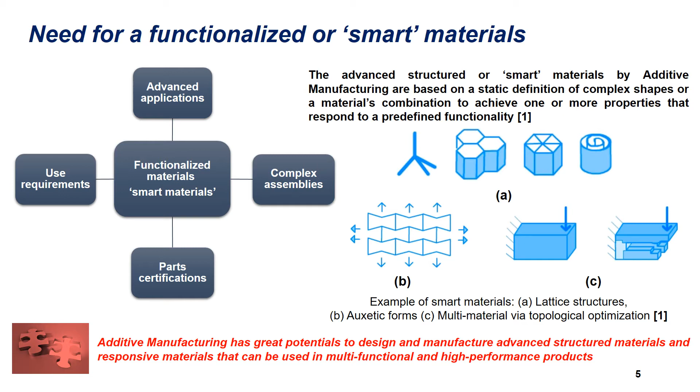Our work deals with developing pre-structured materials using fused deposition modeling process. For this process, classical deposition with plus 45 minus 45 degrees angle orientation is commonly used thanks to its capacity to have higher infill percentage.

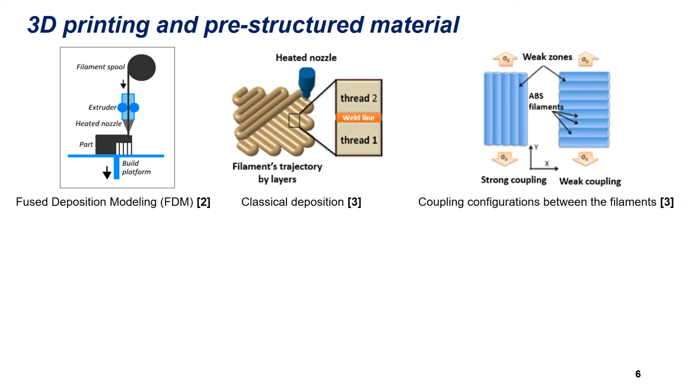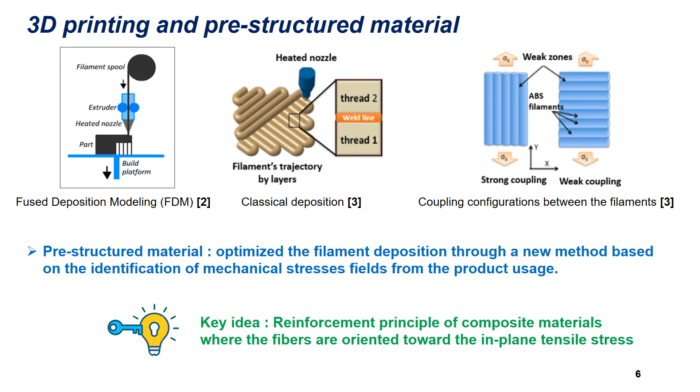Thread deposition can be not suitable to the mechanical constraint of a product, according to its use, especially when a weak coupling occurs between the filaments. Therefore, the filament deposition must be optimized through a new method based on the identification of mechanical stress fields from the product used. The key idea is to orient filaments toward tensile stress, allowing a strong coupling between the filaments similar to the principle of reinforcements of composite materials.

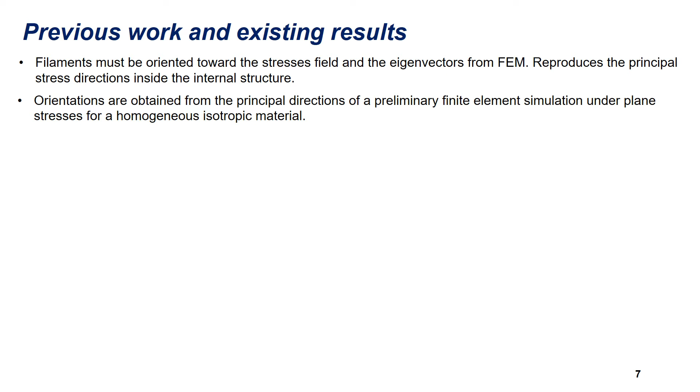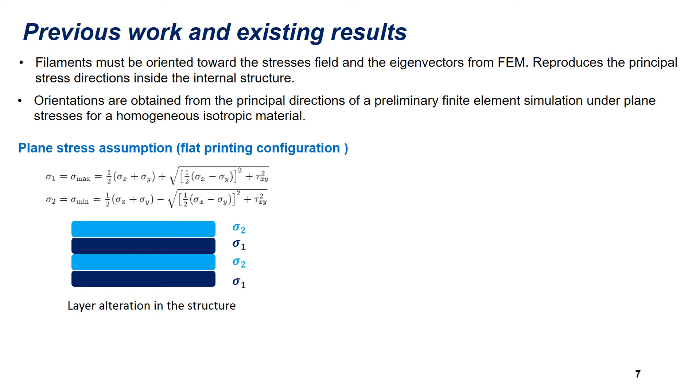An optimized method was developed based on reproducing principal stress direction inside the structure. Those orientations are obtained from the principal direction of preliminary finite element simulation under plane stresses for an homogeneous isotropic material. Since the filament has only one possible deposition angle, a layer alternation inside the structure is used between both principal orientations. In the region where principal stresses are the highest and mainly tensile, optimized trajectories will be generated.

Previous work on a CT specimen proves improvement by over 20% of the fracture toughness, showing therefore the beneficial effect of such deposition method.

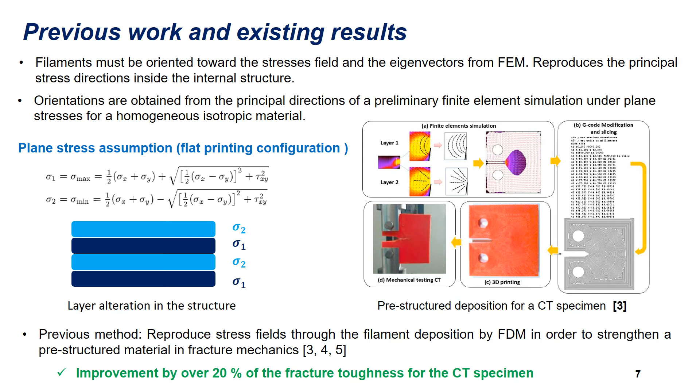For the sake of better understanding this beneficial effect, our strategy is to develop a numerical model based on mechanical characterization of the pre-structured material in order to have a predictive model that goes into fracture.

Such model requires facing some challenges. First, we need to deal with the complex trajectories and the printing parameters, then characterize the mechanical behavior of the material. Once the model is fully developed, it will be used later on to investigate the optimized deposition method.

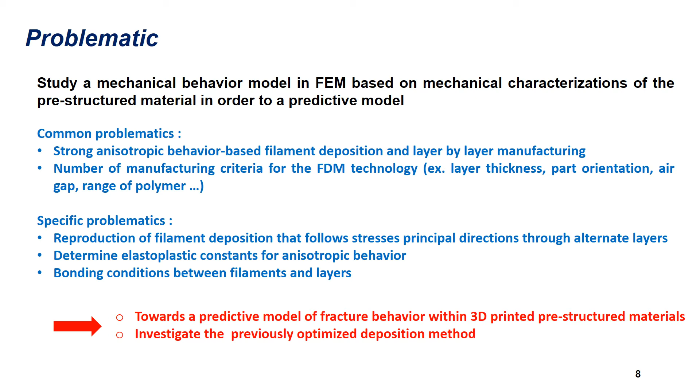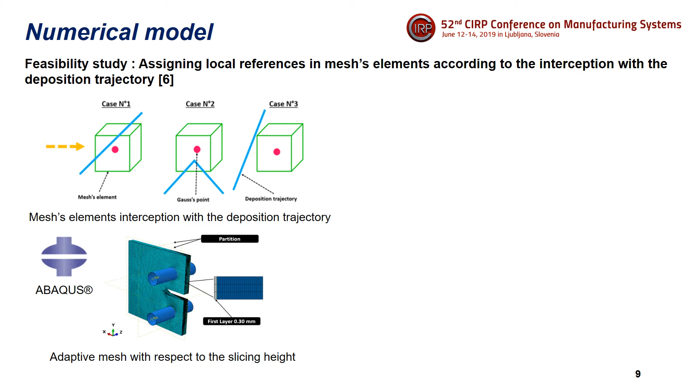Feasibility study was done consists on reproducing the printing trajectories inside a finite element model by assigning local references in mesh elements according to the intersection between the deposition trajectory and each element faces. As presented in the figure here, this method was successfully applied on a CT specimen and both principal directions are well reproduced.

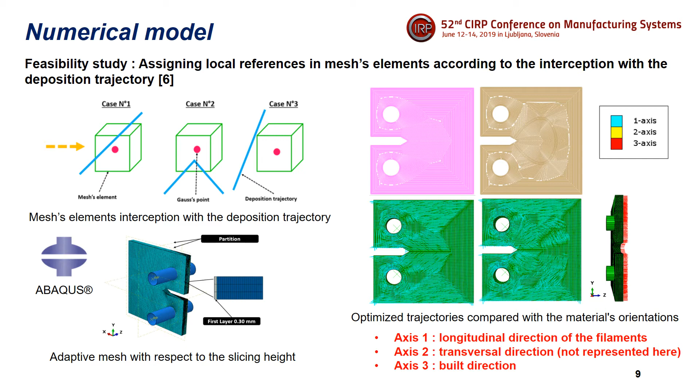For further information about smart materials and optimized method, I kindly invite you to check the following references.

In the next section, the methodology adopted for this work and the purpose of this study will be presented.

Our model requires specific work divided into three steps. One includes built anisotropy, which can be judged as achieved. Second, we need to identify the mechanical behavior until fracture. Finally, we will use peridynamic simulation to model the fracture.

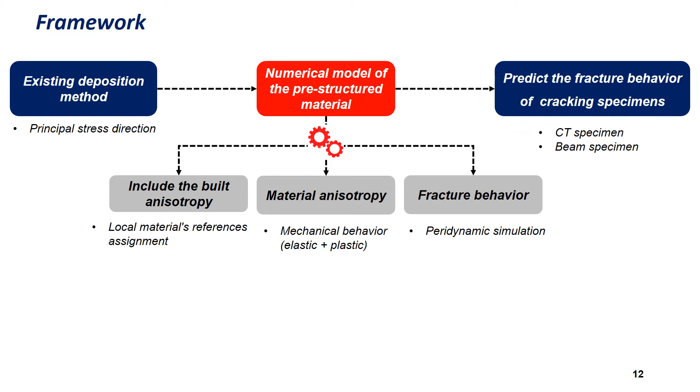Developing a predictive model of pre-structured material poses a challenge, especially identifying the inputs using different identification protocols and experimental methods. Various material constants must be well identified, such as elastic constant, energy release rate, and bond properties.

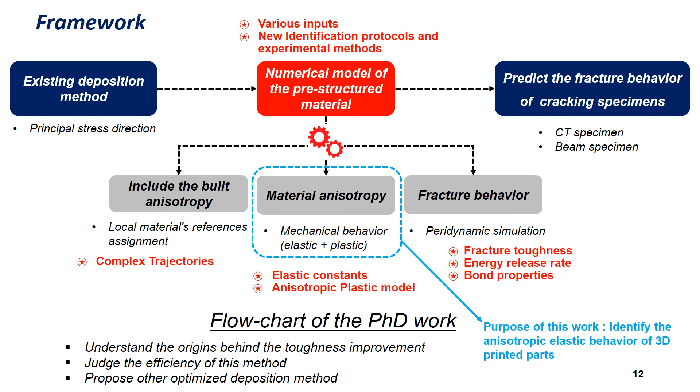The purpose of this work is to identify the anisotropic elastic behavior of pre-structured material using digital image correlation, including longitudinal and transverse modulus, in-plane Poisson ratio, in-plane shear modulus, and the Poisson ratio in the isotropy plane.

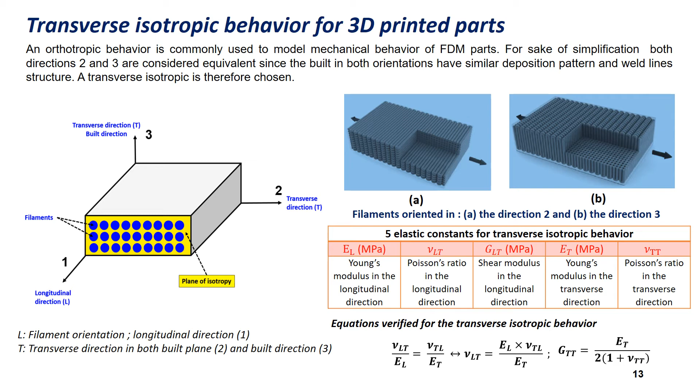For the methodology, first an experimental identification will be done through tensile tests with different filament orientations. Then the identified elastic constants will be validated using an error evaluation by comparing experimental results with numerical results. A cost function will be defined based on difference evaluation between subset data and integration point data.

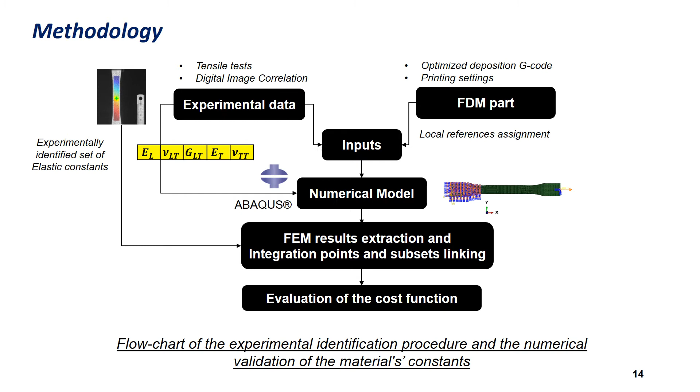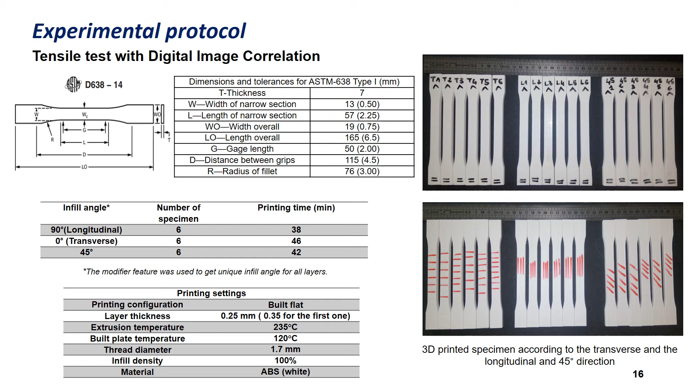The experimental identification will now be presented. Here we start by printing tensile specimens according to the transverse, longitudinal, and 45 degree directions. White ABS filament was used in order to have better contrast while applying the black speckle.

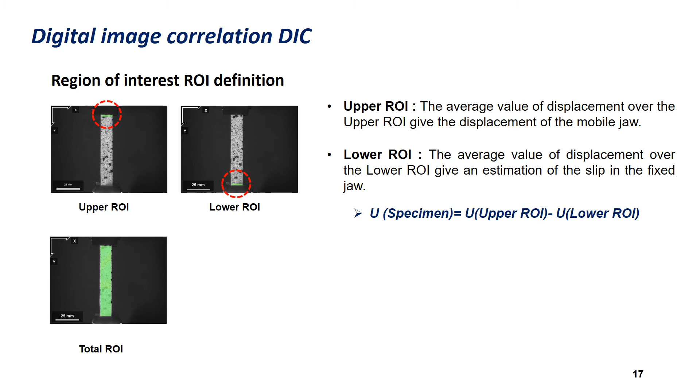For every tensile test, three regions of interest will be selected. A method was used to access the true displacement of the specimen. Here we note that we were confronted with numerous slip problems and filament delamination inside the jaws of the machine. Then a large region of interest is defined to get an average estimation of both longitudinal and transversal strain, therefore allowing calculation of the Poisson ratio.

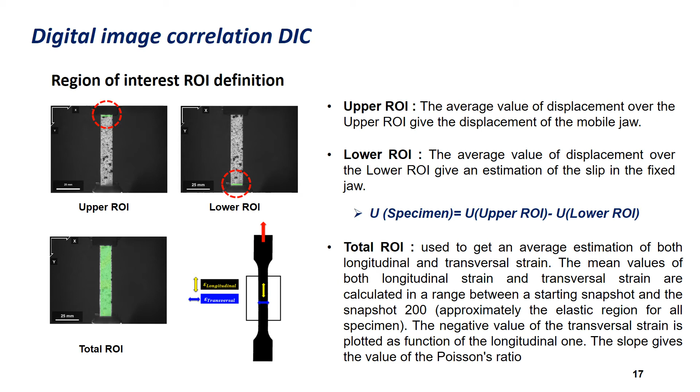Using DIC avoids the problems of placing a strain gauge on the surface of the 3D printed specimen, since the surface is not perfectly flat and delamination of filaments is possible.

For experimental identification, three elastic constants are directly identified through tensile tests: longitudinal and transverse Young's modulus and in-plane Poisson ratio. The shear modulus will be calculated through stress analysis of the 45 degree specimen.

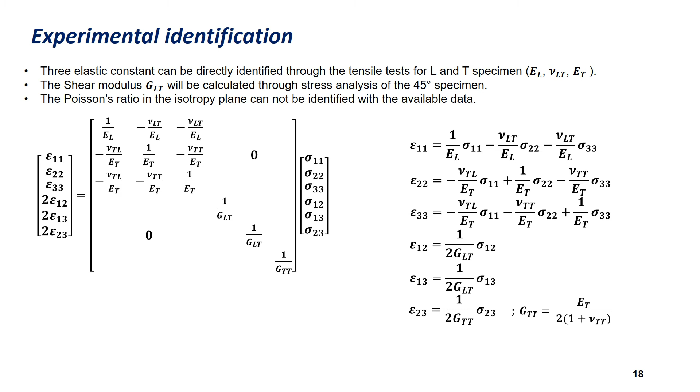For the Poisson ratio in the isotropy plane, we are working with a plane stress geometry and only performing DIC on the surface. As the following equations show, this elastic constant is activated when we have off-plane shear loading or in-plane stress. For the case of in-plane stress, we need to measure the out-of-plane displacement.

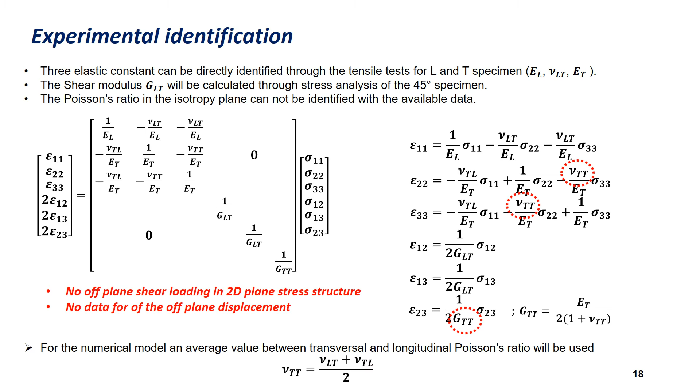For our study, we will use an average value between both values for the longitudinal and transversal specimen.

The shear modulus is calculated using stress analysis of fiber-reinforced composite. Using a coordinate transformation of stress from the global reference to the local one, we can calculate the shear modulus using both longitudinal and transversal Young's modulus previously identified and the experimental value of the Young's modulus of the 45 degree specimen.

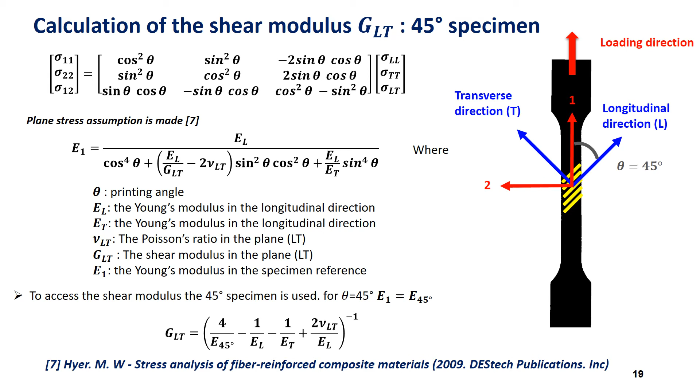Now we go to the results. Reaching the plastic limit with proper stress and strain levels is crucial for our study.

Since ABS presents a non-linear elastic behavior, two methods will be used to calculate Young's modulus. The first is a calculation as the slope of the tangent of the true stress-strain curve at low stress. The second considers a linear elastic behavior that goes until the yield stress point.

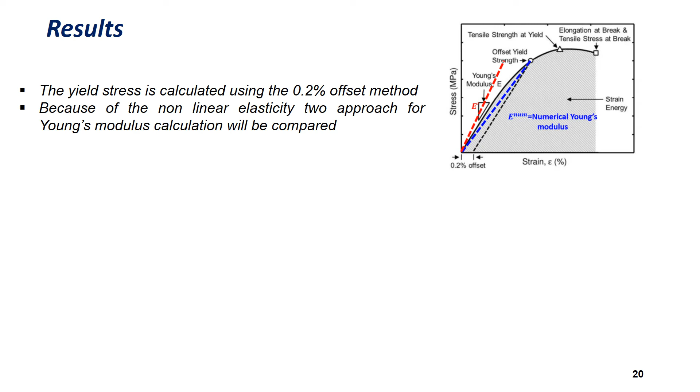Values are then compared to literature, showing some differences that can be related to printing configuration, which can directly influence the mechanical properties. Although both specimens, longitudinal and transverse, show implicate different coupling between the filaments, the values of Young's modulus are very similar. The elastic behavior of the pre-structured material can be assumed as isotropic, and the anisotropy was observed mainly with both yield stress and tensile strength.

For the last constant, we are working on an experimental setup to allow us to calculate it. The idea is to use a digital image correlation setup with two cameras that gives an estimation of the off-plane displacement.

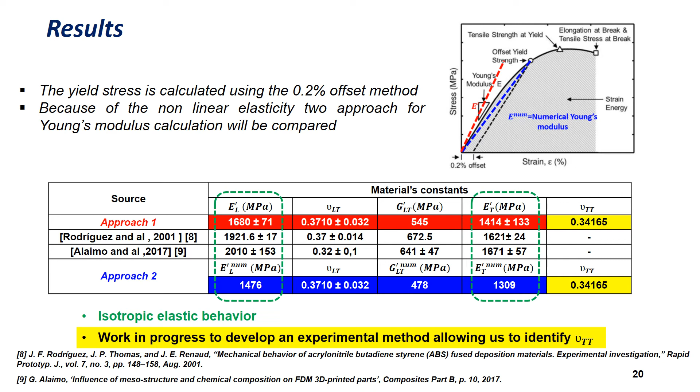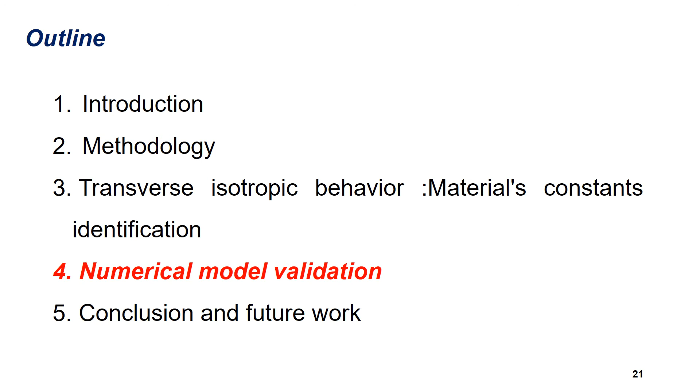Next step is to check the validity of the identified elastic constants. For that, we will use the local reference assignment to reproduce the deposition trajectory into the model.

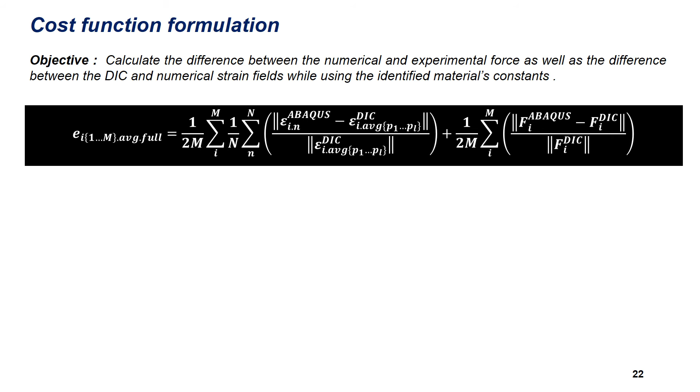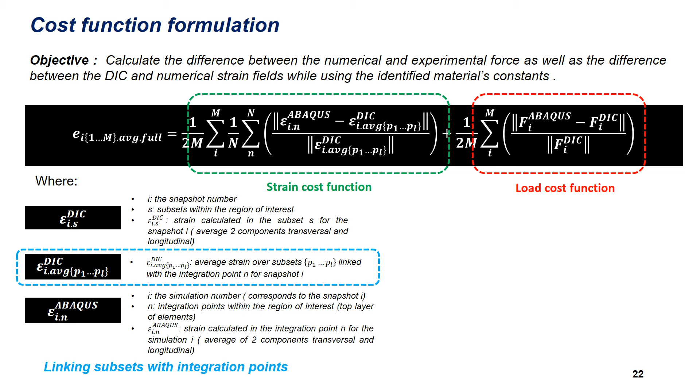The objective is to calculate the difference between the numerical and experimental force, as well as the difference between the experimental strain field and the numerical strain field using the previously identified material constant. For that, a cost function was defined, decomposed into a strain cost function that compares data between integration points and the subset from a snapshot, and a load cost function, which compares the experimental load and the numerical load. We also decided to evaluate the cost function on different loading steps.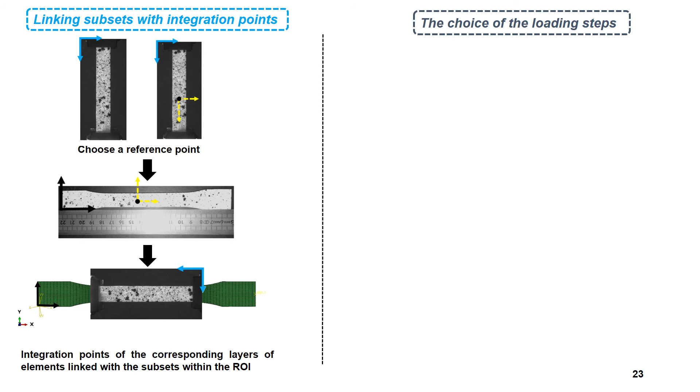First, we perform a linking procedure between the subsets in the reference snapshot and the undeformed mesh. Here, the density of subsets is higher than the integration points, so we decided to reduce data size to fit the number of integration points by linking each one to the neighboring subsets.

Also, 7 loading steps were chosen from the start of the test to the yielding point, but later we discarded the first two because low strain values are easily perturbed by the noise of the DIC measurements, and the measured load values are affected by the loading phase slip, or the slip between the jaws observed in the beginning of the test.

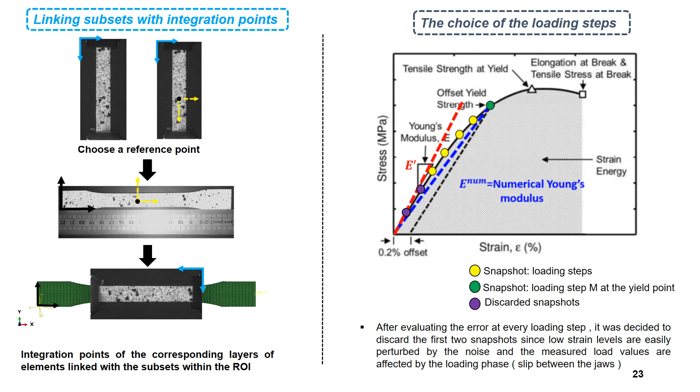Here are the results for the valid specimens. Sadly, for the transverse direction, only one specimen is valid.

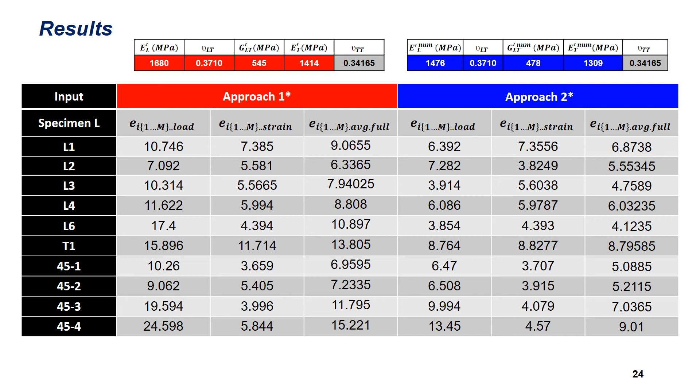To compare both approaches: first, both approaches give accurate estimation of the strain field. The nonlinearity observed with the true tensile curves is the main reason behind the high levels of error for the load cost functions with both approaches. But the second approach is still giving lower error values.

The nonlinearity observed with the true tensile curves is the main reason behind the high levels of error for the load cost function.

At this point, by comparing the final cost function between the two approaches, and especially knowing the purpose of our study is to model the behavior until fracture, it's very clear that approach number two is more appropriate to our project. So this approach will be used.

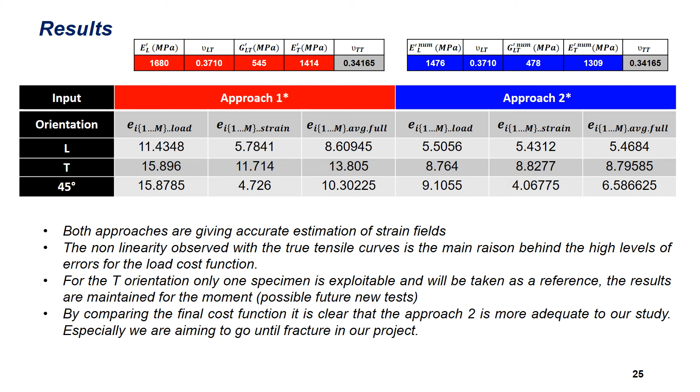Now let's check the validity of those identified constants on a complex geometry. For different printing configurations, bending specimens are chosen. Classical specimens at plus and minus 45 degrees, and an optimized one, are printed, and the numerical models are oriented accordingly.

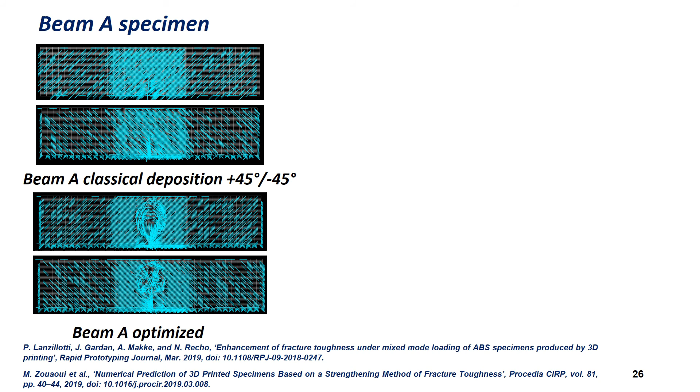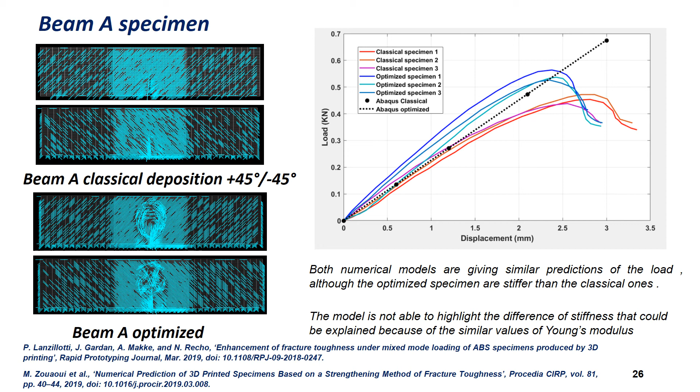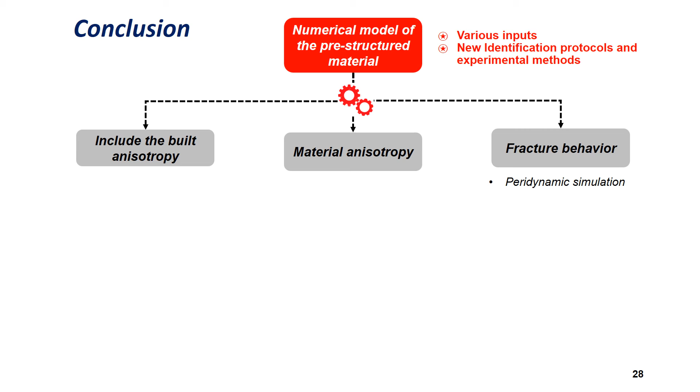Now we finish with the conclusion. As we said before, developing our numerical model goes through three main steps and requires the identification of various inputs. For the built anisotropy, we can say that our method is efficient and allows us to reproduce complex trajectories in the finite element model. Another important finding is that the elastic behavior is almost isotropic.

What we have developed for the cost function evaluation can obviously be used to re-identify all four elastic constants at once, via a finite element method updated identification with an optimization method, on beam or CT geometry, with a specific choice of region of interest according to local loading states.

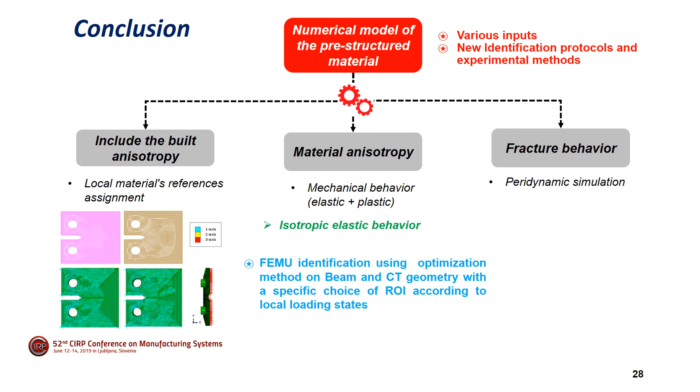A work in progress concerns identifying an anisotropic yield criterion, which is the Hill criterion, and the plastic model that leads to crack initiation. Then, the next step will be to model fracture using peridynamics simulation.

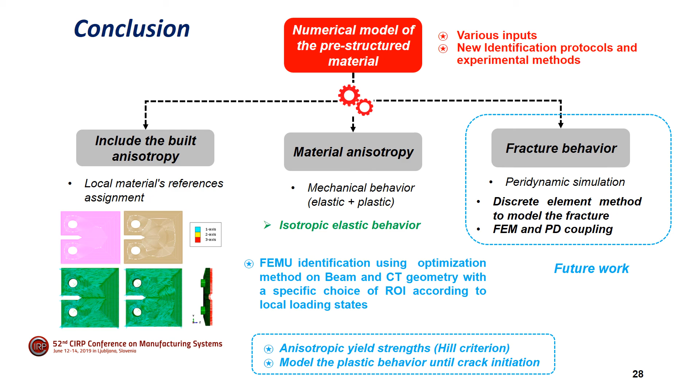The peridynamic simulation theory is an extension of the standard theory of solid mechanics, compatible with discontinuities due to the presence of cracks. The principle is to treat the material as an assembly of discrete points linked together by specific bonds. During deformation, when the deformation exceeds a certain threshold, bonds will break and cause nucleation or extension of cracks. Consequently, the initiation and growth of cracks spontaneously emerge from a peridynamic simulation, without the need to define beforehand an initiation and propagation criterion, which requires a lot of experimental parameters.

The idea is based on preliminary internal work, which consists of using a peridynamic box coupled with a calculation by finite elements in order to follow the propagation of the crack.